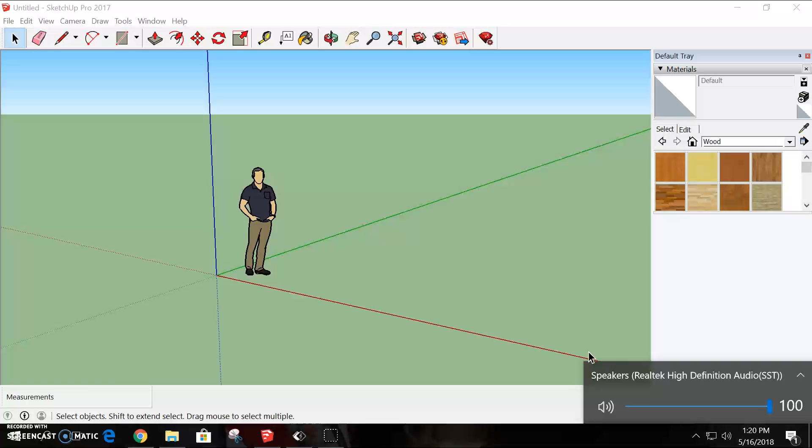Okay, so for today's tutorial, we will be working on building a basic chair.

Alright, so let's go ahead and click on Uncle John there and delete him, tap delete.

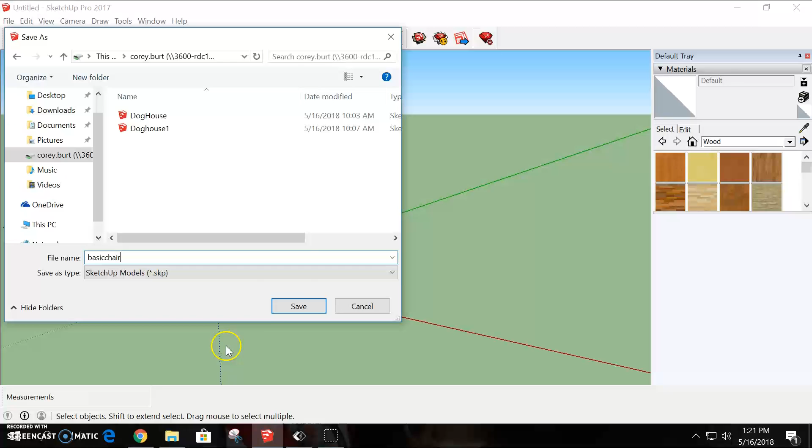Alright, and click save. Alright, so the first thing we want to do in building our chair is to create a square. So go to your rectangle tool,

Click one time, let go, click again, and let's enter 18, 18, enter. Okay, so you have an 18 by 18 inch square.

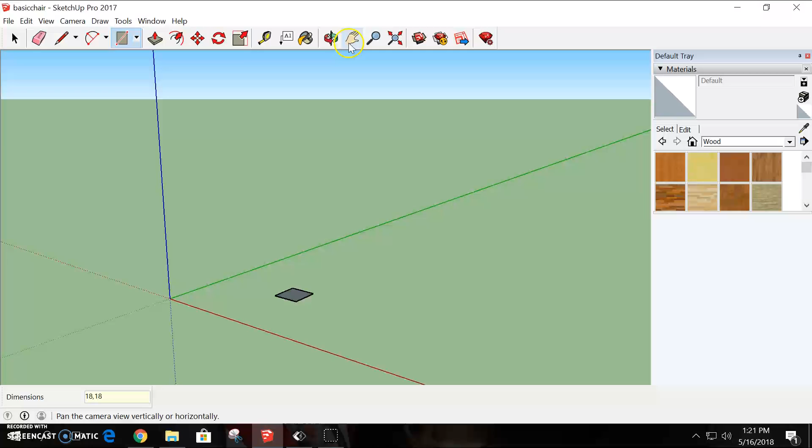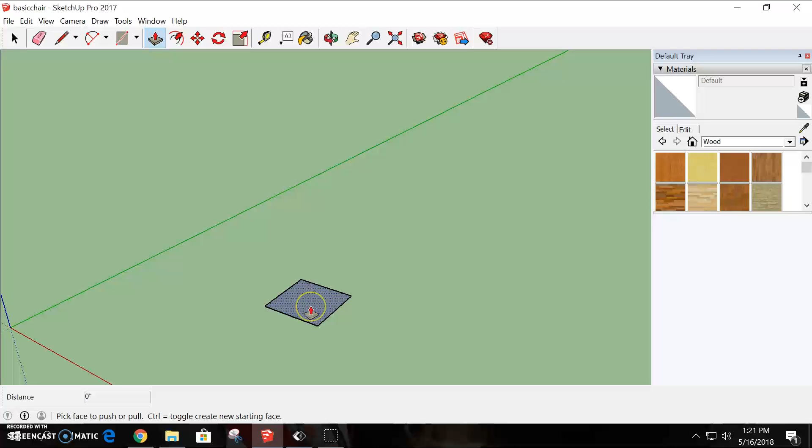Alright, so with our square here, we want to use the push-pull tool, and we're going to pull that up by 4 feet. Okay, so take your push-pull tool, hover over your square, click, pull up, and 4 feet, enter. Again, you can check that using your tape measure if you're not sure about that.

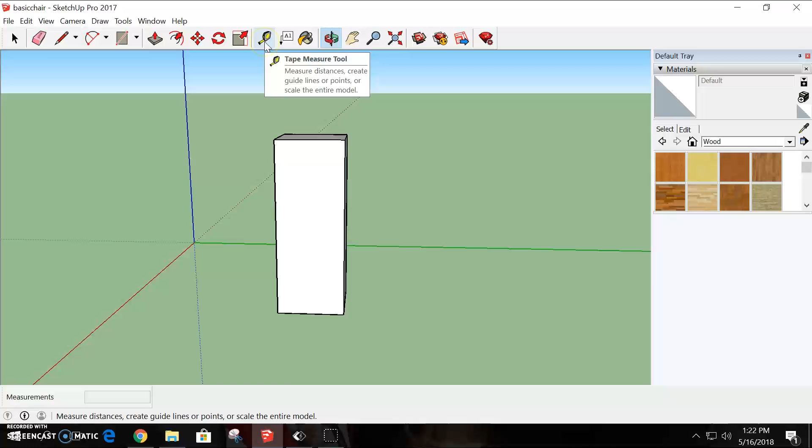Alright, so orbiting around here, now we're going to start molding out our chair. We're going to use guidelines. Okay, so if you will click on the tape measure tool, kind of zoom in a little bit, we're going to create some guidelines to help us cut out our chair.

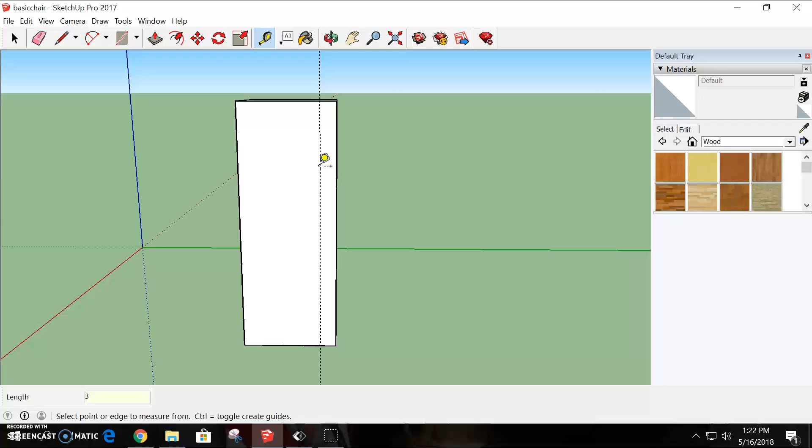Alright, I'm going to scoot this way a little bit. So how to make a guideline, click on the edge there one time and let go and pull away. Without touching anything else, you want to type in the number 3 and enter. So we've made a guideline that comes off of the edge by 3 inches.

We want to do that on the other side as well. So click on the edge and pull away, don't touch anything, then tap 3 and enter. So we've created a guideline 3 inches away from that edge as well.

Now from the bottom, we want to come up by 19 inches. So just find the edge down there, wherever that may be. Come up, tap 19 and enter.

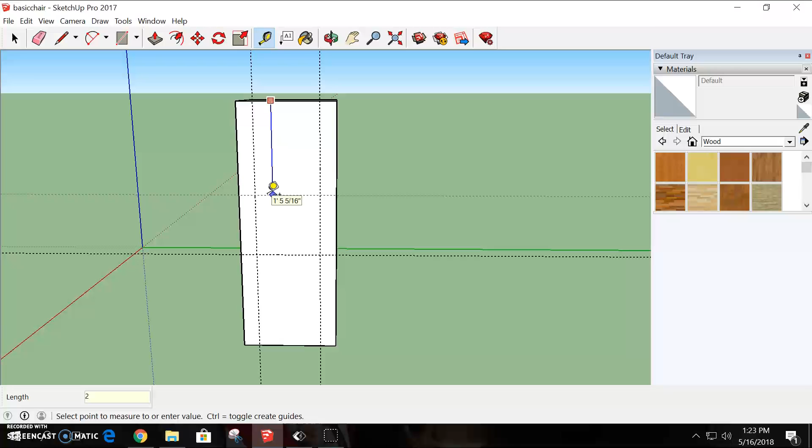Alright, and from the top, we want to come down by 2 feet. Okay, so 2, make sure to hit the apostrophe this time, and enter. Alright, so we have all the guidelines that we need.

Now let's grab our line tool and we will start drawing some lines. Alright, so you want to make sure that your lines are on this face here. So take your line tool, you'll see the intersect there, click one time and let go. You'll want to come all the way down to the intersect here.

I'll tell you what, let's don't do that. Let's come to this intersect, or intersection. Okay, so click there. You can go ahead and go to this one as well. Okay, alright, and let's start down here, intersection, click there, there, and there.

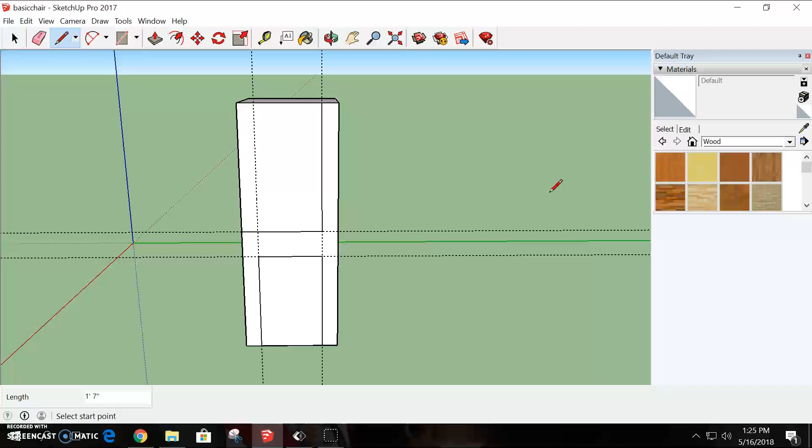Okay, so you can kind of see an outline of a chair or almost like a bar stool there. So now what we will want to do is let's go ahead and use the eraser to take away our guidelines. All these lines get a little confusing.

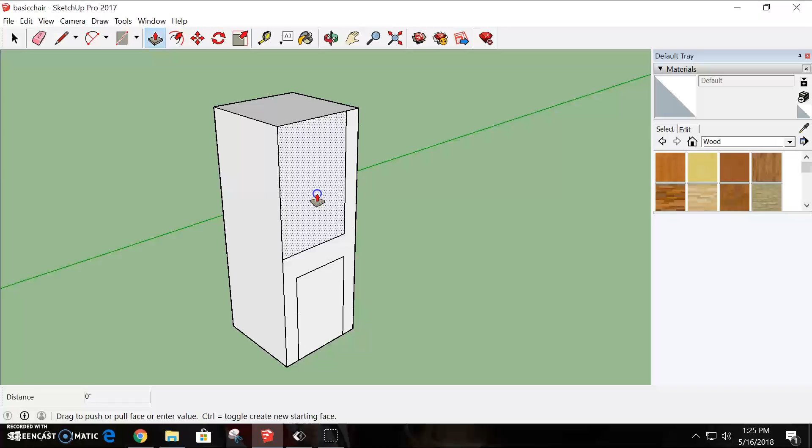Okay, so the next thing that we want to do is orbit around. We're going to use our push-pull tool to help us cut this out. Okay, so we're going to click and drag that away. Same thing here. Grab your push-pull tool, click and drag that away, and you should see space there.

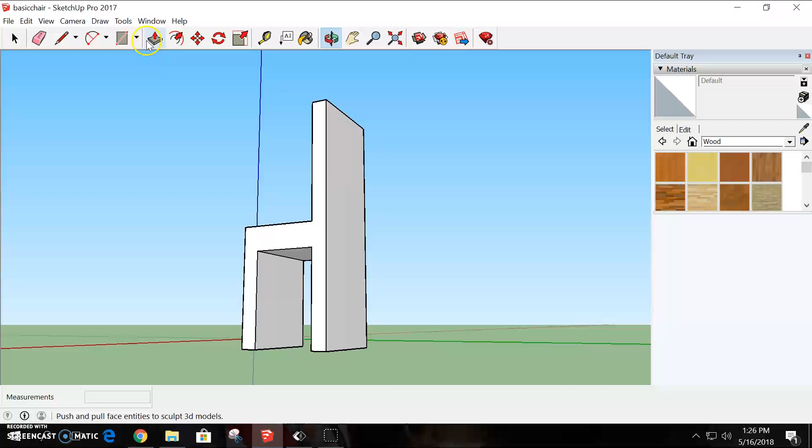Okay, so kind of a tougher part here. We want to get to the inside of the chair. We're going to cut some lines out. So take your line tool. You're going to have to kind of really zoom in. I'm going to pan this over here, and I'm going to zoom in some more and turn around.

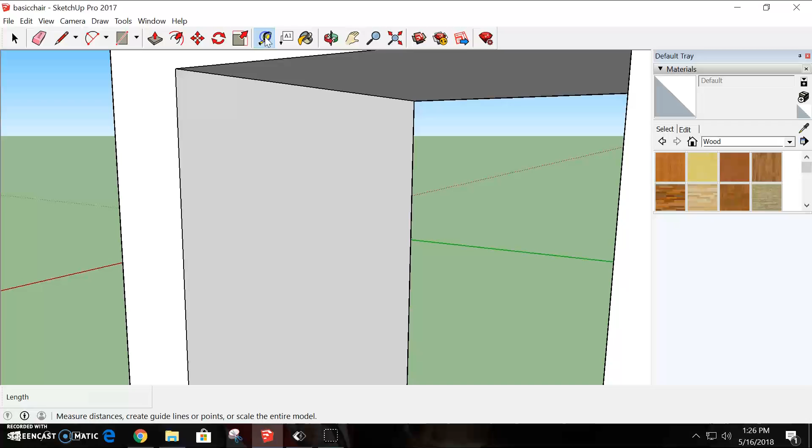Okay, and make sure I'm on the edge here. Let's take our tape measure tool here. One reason I really want to get in here is because I may be on the wrong axis when I'm drawing this.

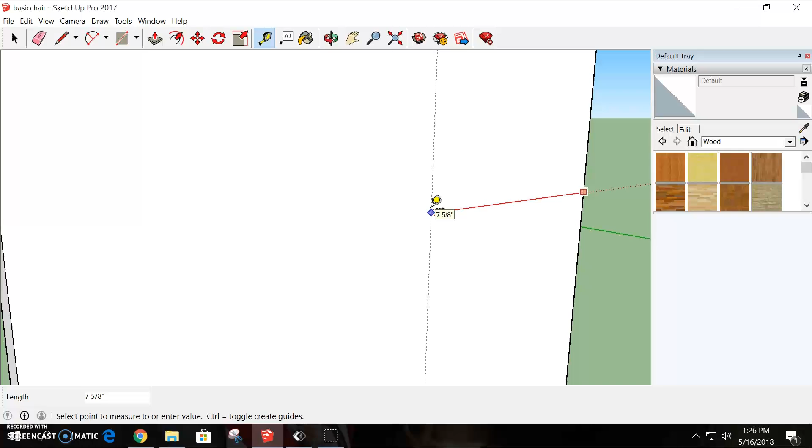So I'm actually going to start on this side. I'm actually underneath the chair right now. So I'm going to take my guideline and draw a 3-inch guideline. Tap 3 and enter. Okay.

I'm going to zoom out. Okay, kind of turn around here. Do the same thing here. Alright, 3 and enter. Okay.

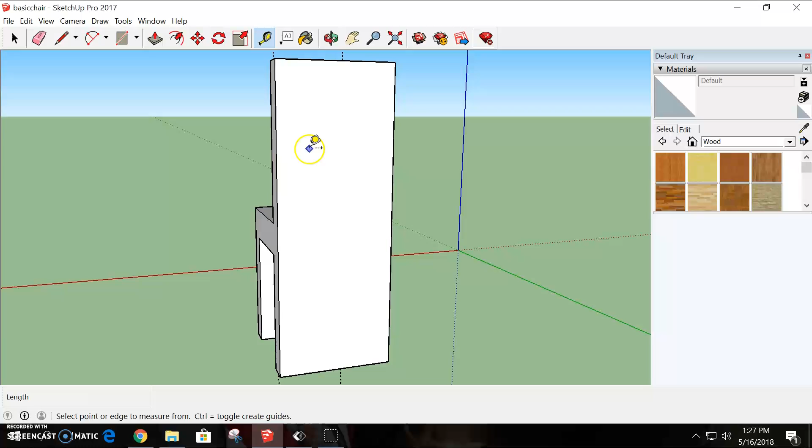So when I zoom out, remember if I get lost, I can always click that, and that takes me back to a better view. Zoom extents. So you can see I've got 2 lines. They're on a good axis there.

Alright, and so you can just simply take your line tool. You'll have to zoom way in there. Get your intersection. Same thing on the other side.

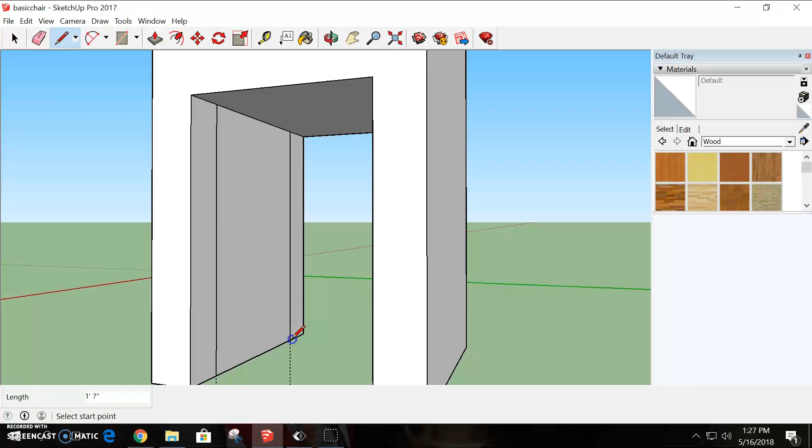Okay, take your push-pull tool and click it out there. You'll want to do the same thing on the other side.

Okay, let's see if I can do this. 3 and enter. 3 and enter. Let's look at that and see where those guidelines are. Oh, right on the face.

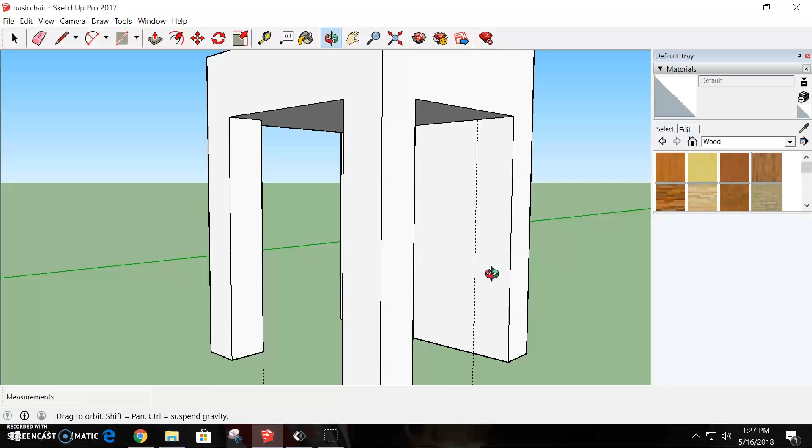That's good. Okay, so go ahead and draw your lines that way as well. Get a little better view of this. Alright, click there, click there. Intersection. Take your push-pull tool and push out.

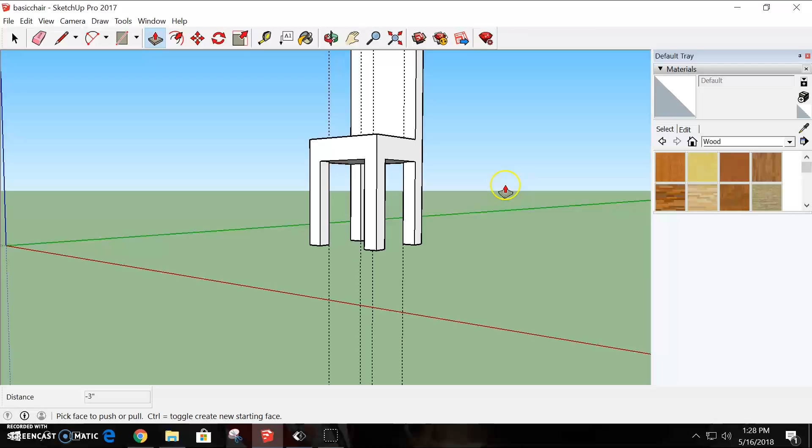Alright, so here we are with a chair. Again, take your eraser and knock out those guidelines.

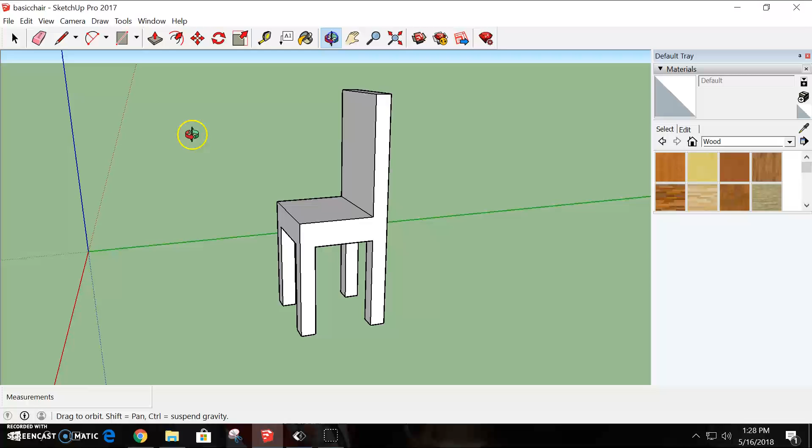Okay, alright, so let's add a little flair to the back of our chair here. Alright, so I'm going to take my 2-point arc. I'm going to click on this side and let go, click on this side and let go. I'm going to come up, and my half circle is off just a little bit there.

So I'm going to go right in here. Tell you what, I'm going to redo this. Control Z that, Control Y. Alright, come down a little bit more with that 2-point arc so I can achieve my full half circle.

There. And if you don't want to do the half circle, not a big deal. That should snap in right there. I'm going to go up just a little bit more, make it look a little more symmetrical there.

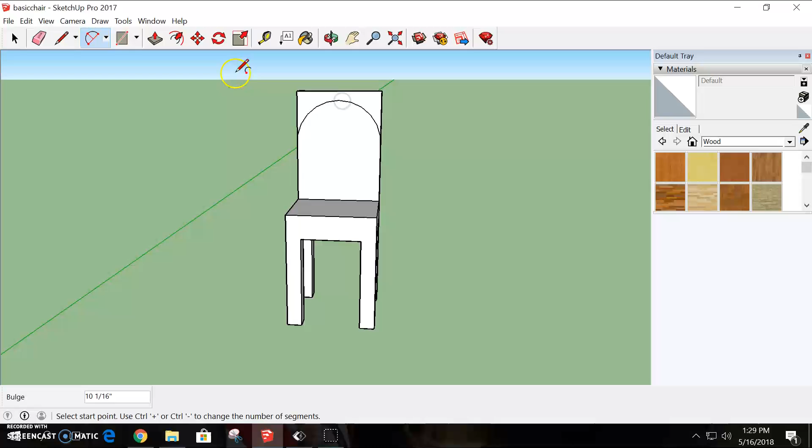And I'll click. Okay, and you can take your push-pull tool, and push that out. And there we go. Okay, so kind of a rounded back there, top.

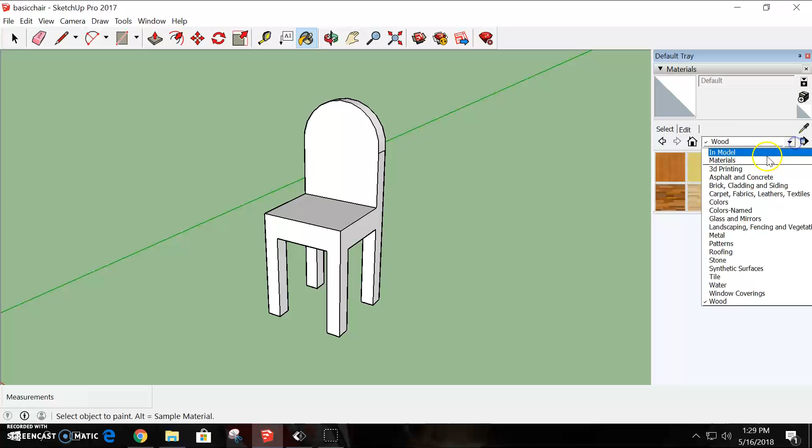And now the fun part. Okay, so take your paint bucket, click on wood, and start Bob Rossing it here. Okay, color everything, happy chairs.

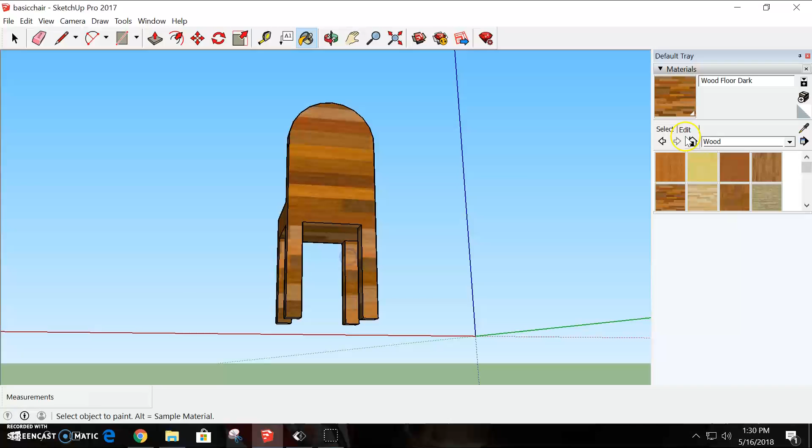Alright, coming on along here. Some more wood, happy trees. Alright, final side here. Alright, and you have a basic chair.